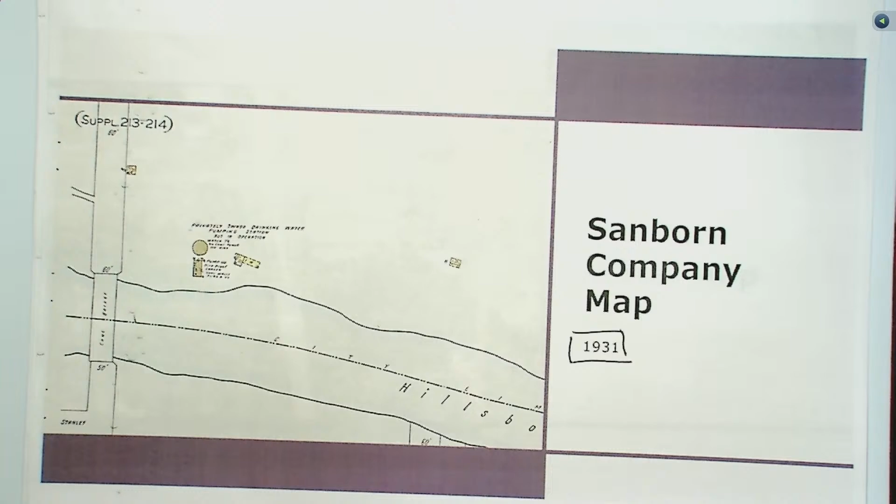Just a little bit of background: looking at the iconic tower, it's very distinguishable. It was built in 1927 by Josiah Richardson, a developer who wanted to create a destination point for Tampa, for people to come here and vacation. The tower is 214 feet tall, and 45 feet deep going into the ground. It's Gothic style, and if you dissect the building you'll see the lanced windows, the crenellation around the parapet, and at the lower level, the buttress.

It was designated as a local landmark in 1989, and this was the inspiration when Mr. Richardson had his vision coming forward.

Sulphur Springs was a park, as I stated, a destination for tourists and locals to visit. It was accessible by streetcar, which came all the way there, far out from people within the city. It included a swimming pool and an alligator farm. The pavilion is still there, just to the east of the tower, along with the gazebo.

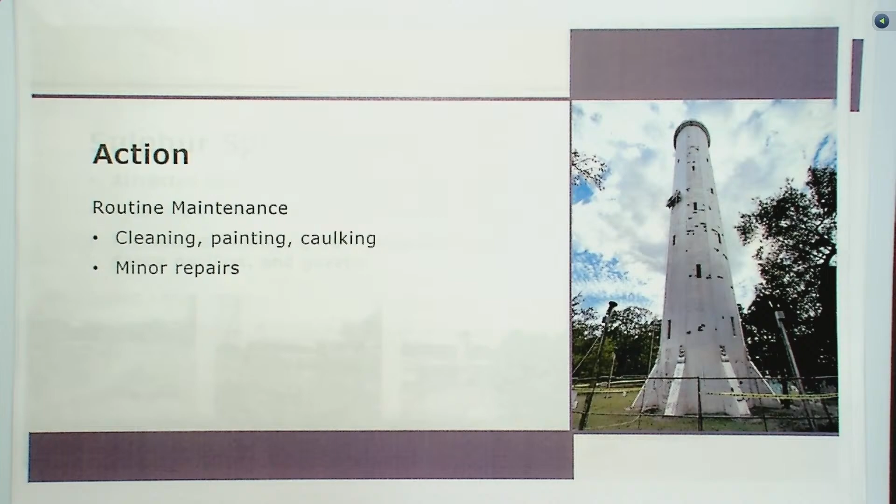We recently did a renovation to the structure. Just sensitivity cleaned it per the Secretary of Interior standards, then painted, caulked it, and did minor repairs. If you get a chance to go by or look at it from a distance, you'll see that it's changed its appearance. Moving forward, we'll use the application standards from the Secretary of Interior for the rehabilitation. It was a successful project.

It's still a park, it's open. You could come off of Bird Street, go there. You could access the river right there as well. And then I talked about the gazebo as this kind of partner companion building that's there that you could walk through a trail and go that way as well. So that's preservation in progress for this month.

Now moving to legal, she'll address the board. Good morning. Dana Crosby Collier from the City Attorney's Office.

Regarding the conflict of interest, does any member have a conflict of interest with any item on the agenda this morning? I do not. Thank you. Has any member had an ex parte communication regarding any item on the agenda this morning? I've had none. Okay, thank you.

Thank you, Dana. Moving down the agenda, there are no continuations reflected on this morning's agenda, and we're ready for the swear-in. Ms. Guzman will swear everybody in that wishes to testify.

Please stand up and raise your right hand. Do you solemnly swear or affirm that the testimony you'll be providing today is the truth, the whole truth, and nothing but the truth? I do. Thank you.

The first agenda item is BLC-24-0000-101, for the address of 1901 East 7th Avenue. There is a contributing structure at that site, dating back to 1905. The underlying zoning is YC1. The existing square footage is about 11,000 square feet, and they're looking to add 8,000 square feet. The request this morning is for a certificate of appropriateness for new construction in addition to a contributing structure, with site improvements.

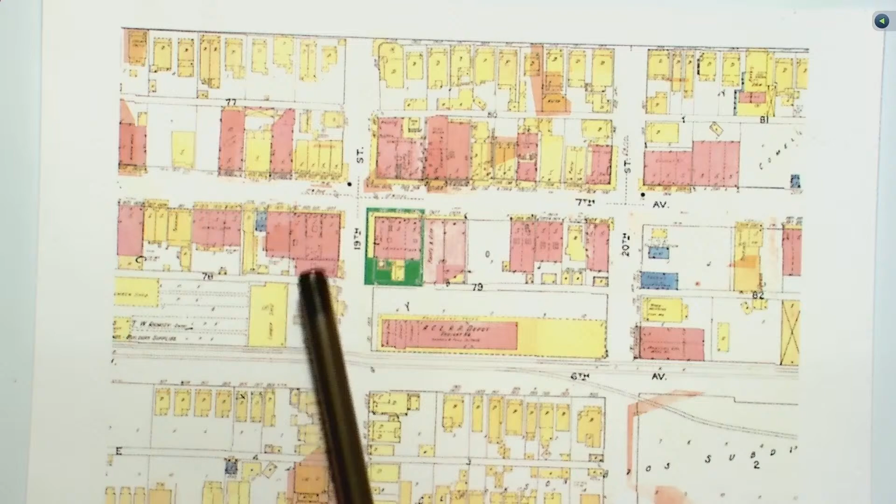This is from 1929. The red indicates brick construction, yellow is frame construction. You see some smaller buildings here that were stores that anchored in that corridor back in 1929.

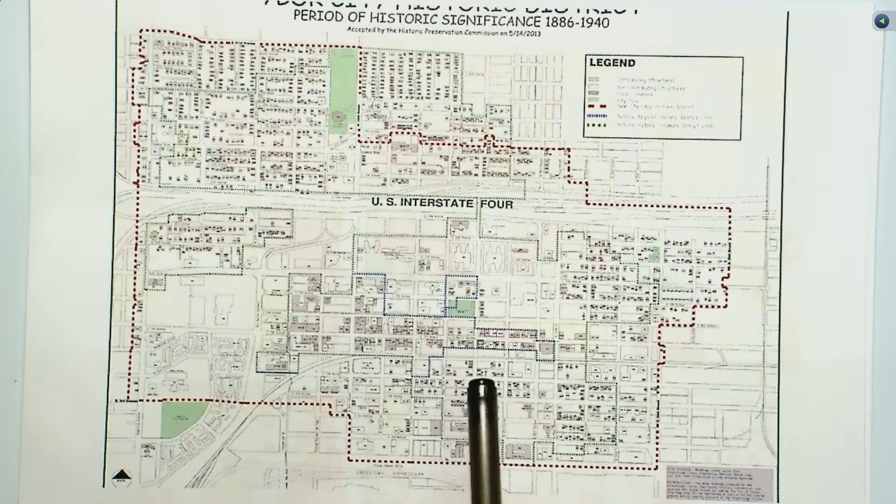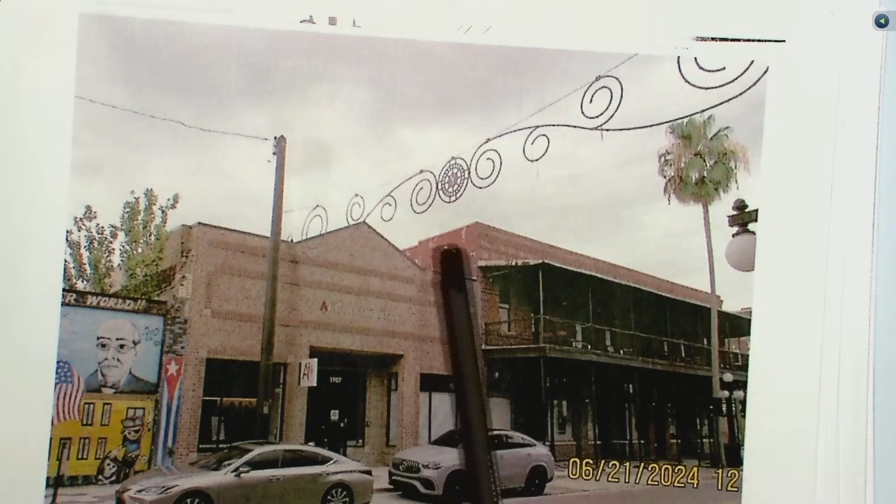This is the abutting building on 7th Avenue. This is the property in question, and just kind of a different perspective of what you see there. And to conclude, a couple of street shots.

Hello, my name is Andrew Matson. I've been sworn in, and I will be the architect of record for the project. I'm a partner of AI Collaborative, which is the building right next door.

We're looking at redesigning, or making a building addition to, 1901 East 7th Avenue. That actually used to be my old office building, so I have a personal connection to it. I worked in there for 12 years.

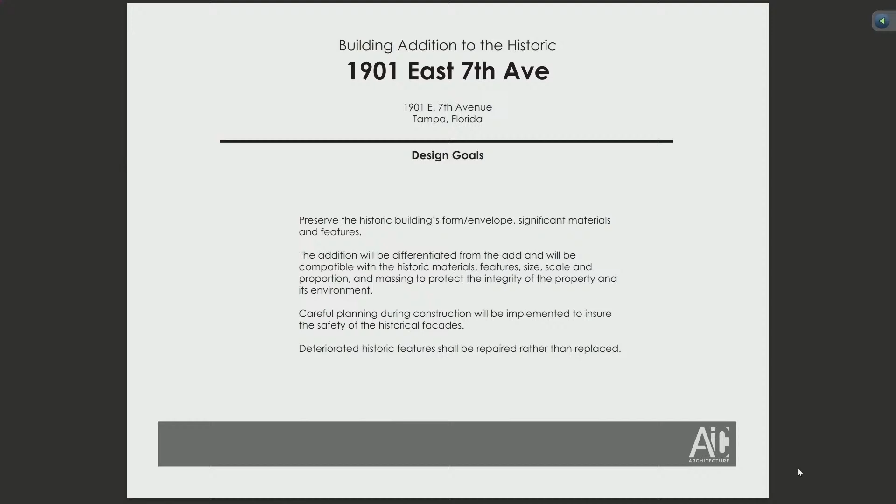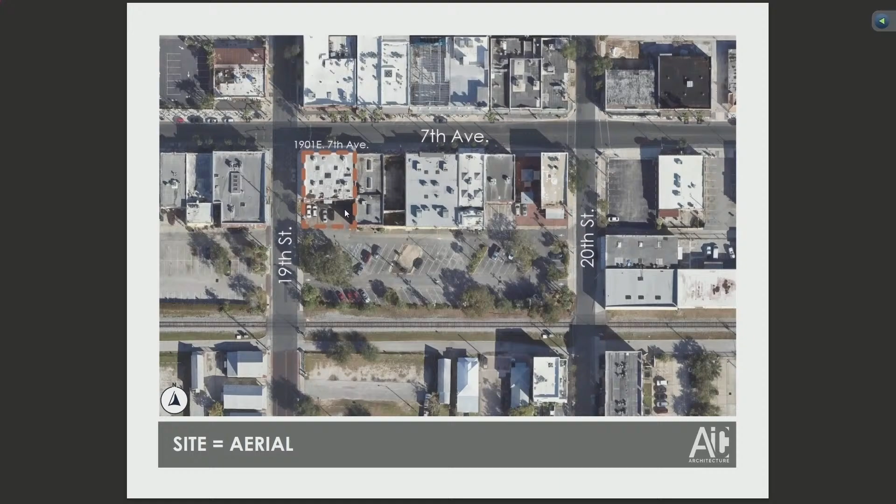As Ron said, it's right on 7th Avenue, right across from Acropolis, right next to our office on 7th Avenue. The addition is going to be, like Ron said, in the back of the building. There's the property on 7th and 19th. You guys have all seen the views that Ron has done. The corner, the addition, which will be in the back.

So the back of the building, I'd like to note that on our renovation, the back of the building is actually not brick right now—it's stucco brick. It was in disrepair a long time ago, and they had put in stucco brick to fix it. So when we're renovating, we're going to keep all the facades minus the back of the building.

So we'll have 19th, 7th Avenue, and even the wall abutting our old property. We're going to remove the back wall, and we're going to remove the actual floor structure of the building to reinforce it, because it's a wood structure that's got damaged, termites. So we're going to renovate the whole interior too.

As Ron said, we're planning to add the hex pavers along 19th Street. Currently they stop right at 19th, but we're going to wrap the corner on our building.

This is just showing the alcoves. We're maintaining all the alcoves of the existing building, the tile pattern, and such. Part of this is also going to have ADA renovations, because it has to currently meet current ADA code. So some of these pieces will have to be brought up, but the main entrance will be ADA accessible. This is not going to be the accessible entrance, showing the existing.

So this is the view showing the original historic brick to the stucco brick that wraps the corner. Some of these are existing materials of the building.

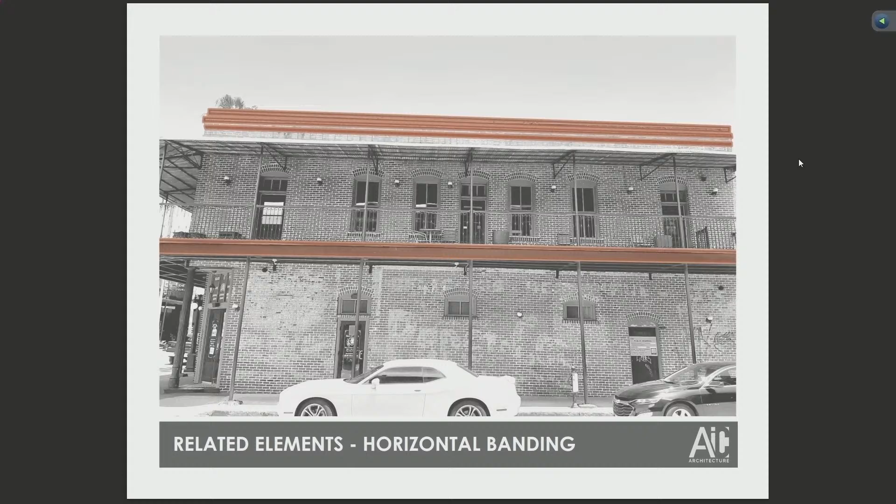Here, this is part of our design—the horizontal banding, as Ron had stated, the balcony, the banding of the building, matching the front facade across the street and its banding. When we do our connection from our new building to our old building on 7th, we're going to do a glass hyphen, very similar to what we had done on the German American Club.

So here's the existing building, showing the existing structure and our proposed addition. Part of what we're doing to differentiate between the new and the historic or contributing structure is we're actually not going to be right on the property line. We're pulling it back off of 19th by about 3 feet.

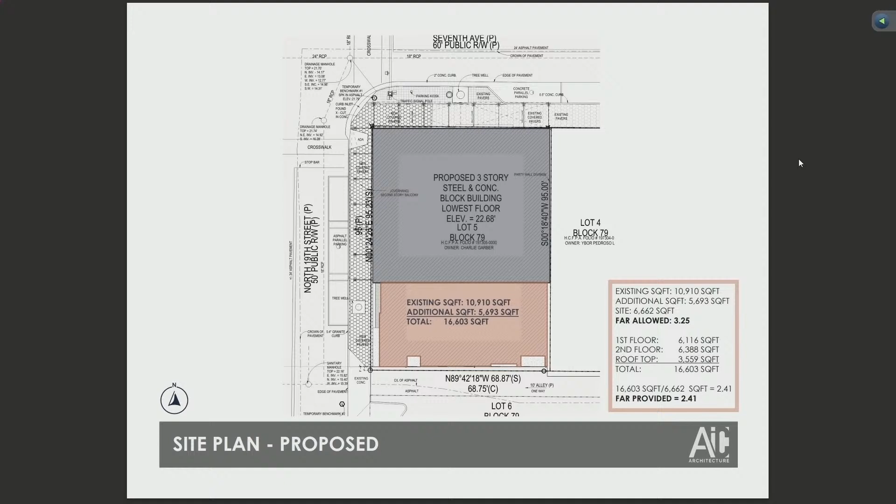Also in the back of the building, we're going to have some service doors, so we'll pull it off the property line back there—about 2 feet off the back property line. In the existing structure, we're going to demo. When it was a retail store, there were 3 different bays, each at different levels and different heights. We're going to clean it up.

Part of the structure, when we demo the building, we have to put new supports, new columns in, so we're going to have to remove the floor slab. I have my structural engineer here, Laura Minton, if you have any questions about the demolition, because we're going to be very sensitive to the demolition of the project, so that we do not have any type of collapsed structure.

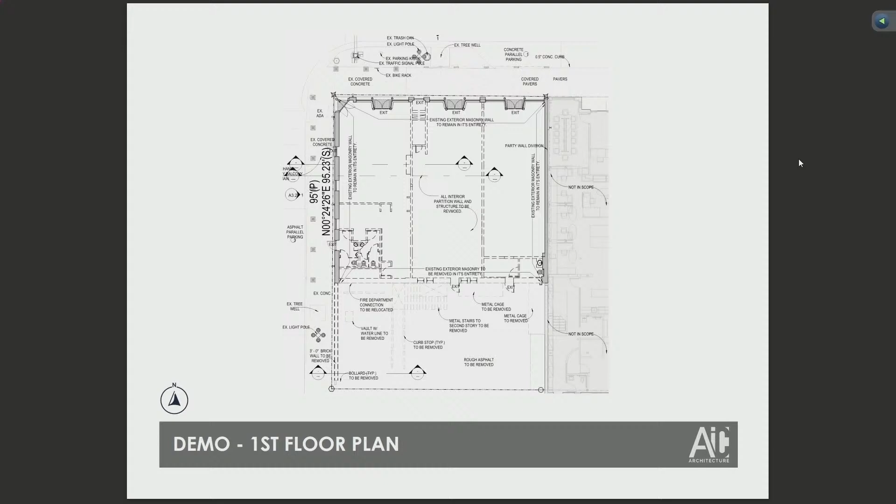We're gonna do micro piles inside the facility. Then as we remove the structure, we'll shore it up. The steel frame will then be put in, and we'll stabilize the building as we do the demolition.

The second floor was office space. We're demoing the roof, because we're gonna put a rooftop terrace on it.

This will be minimized, so we've pushed it back, and we've worked with staff tremendously on minimizing our impact to the existing building.

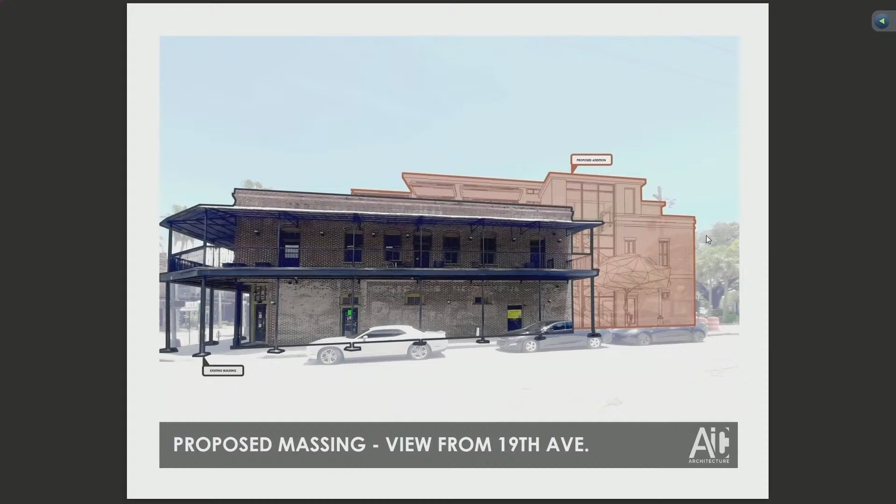The building masses, we have obviously going up 3 floors now, but we're trying to keep the addition from the street level from 19th working very hand in hand with the existing structure, but keep it differentiated from the existing structure. So that's the glass connection to the brick addition in the back.

So in materiality, we're keeping the 2-story addition that's in the back. It will be brick. It's going to be painted brick to differentiate from the historic brick.

The glass connector will be a storefront, or actually a curtain wall, very similar to the German American Club, where you don't see the frame. The frame is behind the glass. It's an SSG system. The top addition is going to be stucco and glass operable walls.

So the glass that you see, we're trying to bring the inside outside. In the times of the year when it's acceptable to have the building open, we're going to open it up and get it as open as possible.

The back of the building, that's where the addition is. It's going to be brick. And again, we differentiated, we keep the brick only going up 2 stories. Then when you get up to the 3rd-story addition, it's going to be stucco to keep that hyphen.

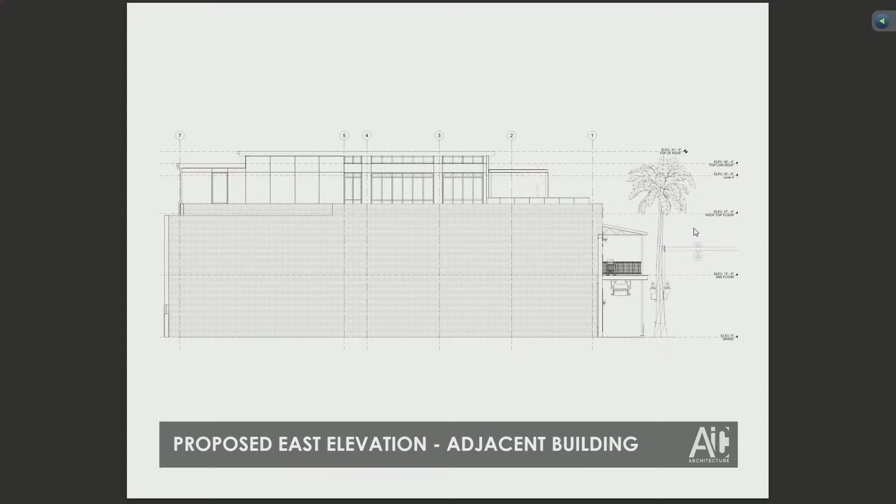Again, this is the eastern view. This is actually an impossible view, because my office sits right here, but this is just the east elevation on it.

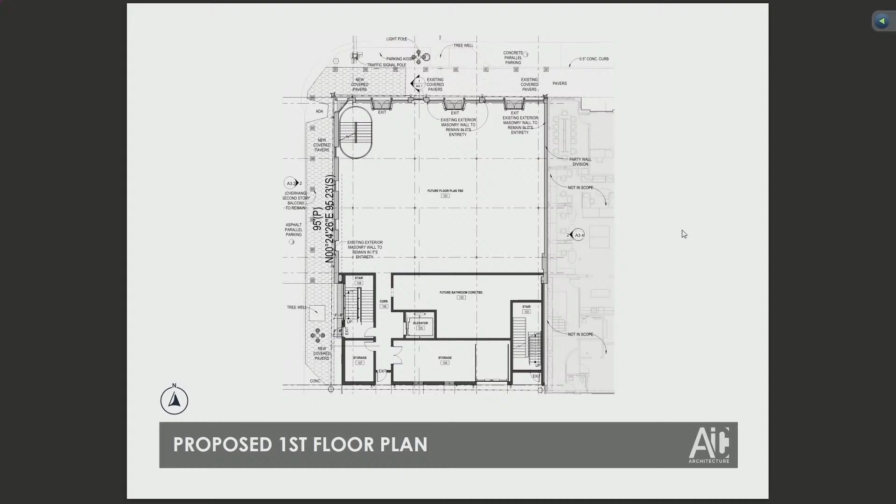The floor plans, you can see the columns, basically what we're trying to do. Part of it is we can't go right up against the walls, so we have to be very careful of the foundations as we drill, to not disturb the foundations. So we're pulling all our columns off the wall to help with the structure of it. Exiting.

We don't really want to see the addition, so we've pulled it back sufficiently so that you don't really see the enclosed portion of it.

And again, this portion of the interior is actually going to be interior-exterior. We're going to have the folding partitions of glass so they could open up the system and make it flow from the inside to the outside.

And again, this is the sunshades, the louvers, the operable shades for the exterior.

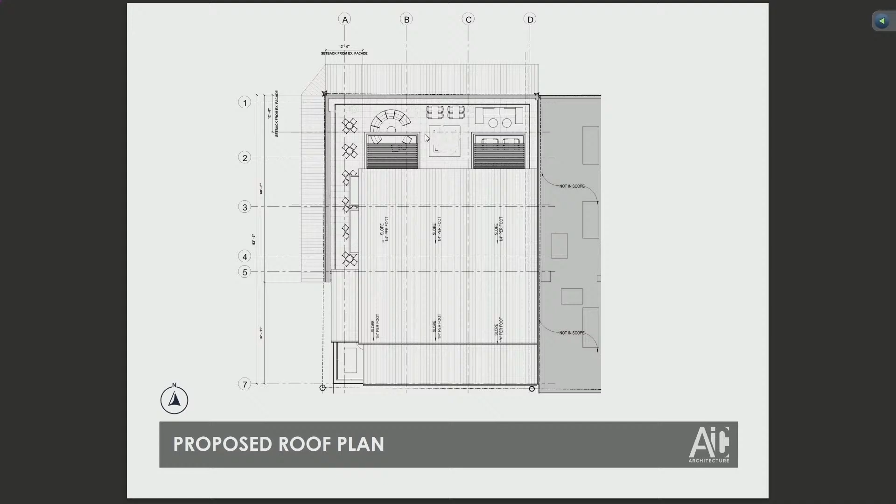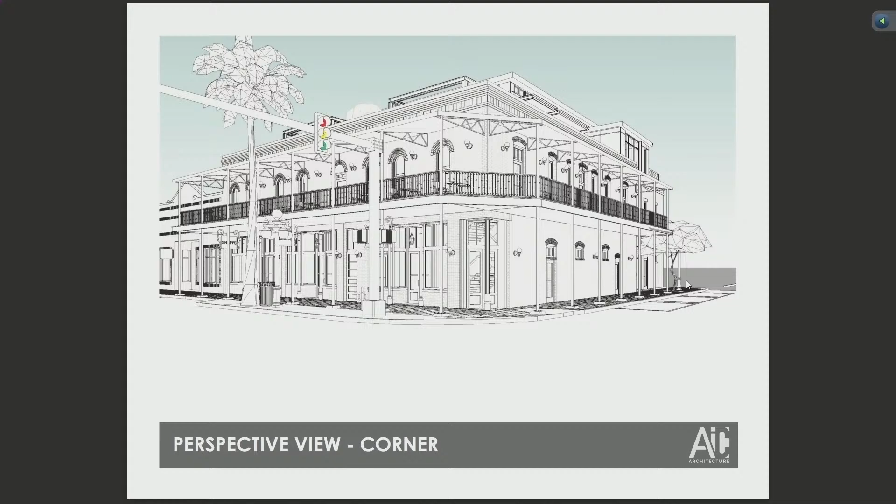Going back to the 3D views, we're being very cognizant to try to minimize the visual impact from 7th Avenue and 19th Avenue. You can see we're wrapping the brick. The pavers currently stop right about here—these are the hex pavers, and we're wrapping them all the way around to the drive lane of the existing building. These are just the black and whites on this.

Our wall sections—part of what we were doing, again part of minimizing the impact, is stepping back the existing facade. So we did a section, line of sight, basically as we're stepping back we're trying to keep the building and the view as minimal as possible from it. We took a proportion from the balcony and went back 12 feet, then another 12 feet, so that every time you step up, we're really trying not to have that visual impact from the street level.

One of the things I'm sure you saw in the initial design of our exhibits was deemed not compatible. Part of it is the elevators—the massing was actually a lot bigger. So we worked with staff and with the client to really try to make the massing better. One of the original designs had the elevator in the back corner. We've since moved the elevator inboard to the project, which helps reduce that corner and allows us to lower or step the massing back of the building.

So this is the original—on the July 3rd submittal, that orange part is the mass that was bigger, a 3-story volume. As we move the elevator back in, it allows us to really reduce the mass of the elevator. Also, the top structure was a lot taller; we've since dropped it 3 feet. So our building now, the top of the structure is about 41 feet, which is still 4 feet below the maximum height. We've also worked on lowering some of the shade structures and pulling them back.

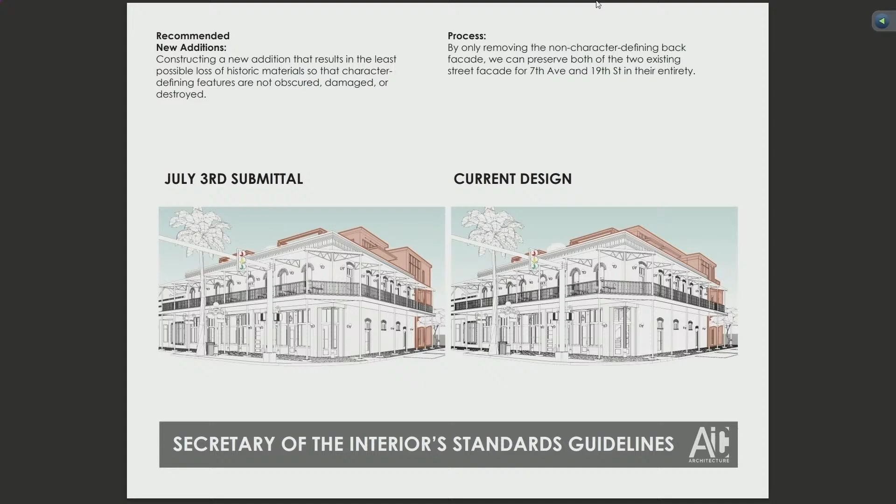So this is, again, the massing structure. Part of it too is going back to the historic preservation standards, working with the massing and trying to differentiate the new structure from the old structure, but be very compatible with it. We're still keeping the horizontal banding, but as we've lowered it and pushed it back, I think it's actually a lot more proportionate now. We're actually very happy working with staff on it, because I think staff has made it a better project for us.

Same thing, this is just the current designs—the windows, our placements of our windows, keeping the existing structure. Actually, as we're rebuilding, we're keeping our floor-to-floor heights the same, so it's just 13'8" roughly between the first floor and second floor, and then another 13'8", and another 13'8".

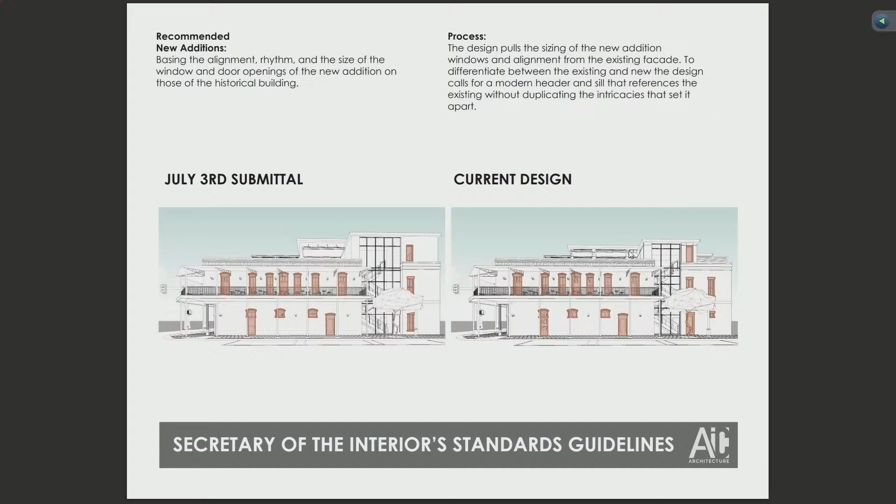Because of the elevator, that's another thing—we had talked about working with staff on lowering it, trying to lower it as much as possible, but we could only do so much because of the overhead clearance required for the elevator to get you up to the top.

This is the glass hyphen, the reduction. You can see how much we've reduced it, and actually made it more proportionate to the building addition.

Again, these are the mass lines, so these are the step backs—there is no structure in the orange area to help reduce it. We've even worked with them on the handrails, because obviously the parapet of the building is not high enough for the ADA or for the handrails or guardrails for fall protection. We've pulled the guardrails in—they're going to be glass, but we've pulled them in about 3 feet off the property or off the edge of the parapet, so you won't even see the guardrails.

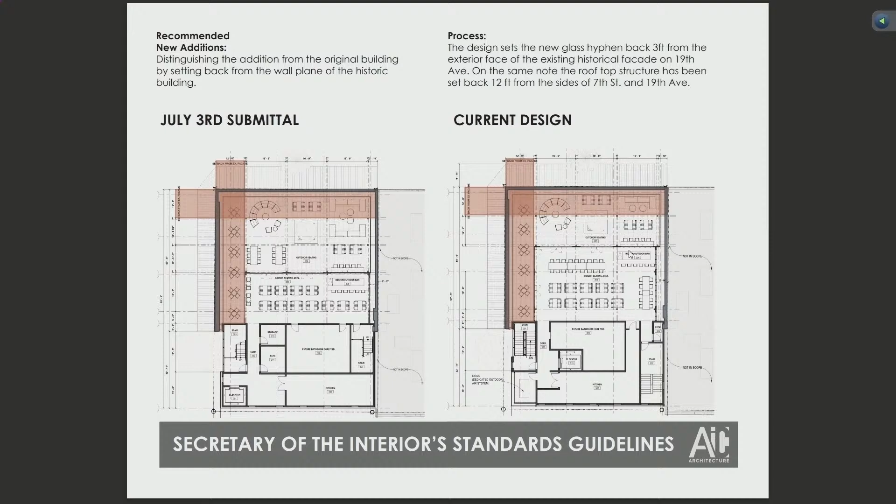Our colors, we're keeping the brick and the stucco is going to be painted a dark gray taupe color. As we played with different versions, lighter neutral colors actually started standing out more, and the dark colors really help reduce the massing of it. So the gray color is the brick we're painting. We're going to use the same style brick, but we're just going to paint it to differentiate the brick.

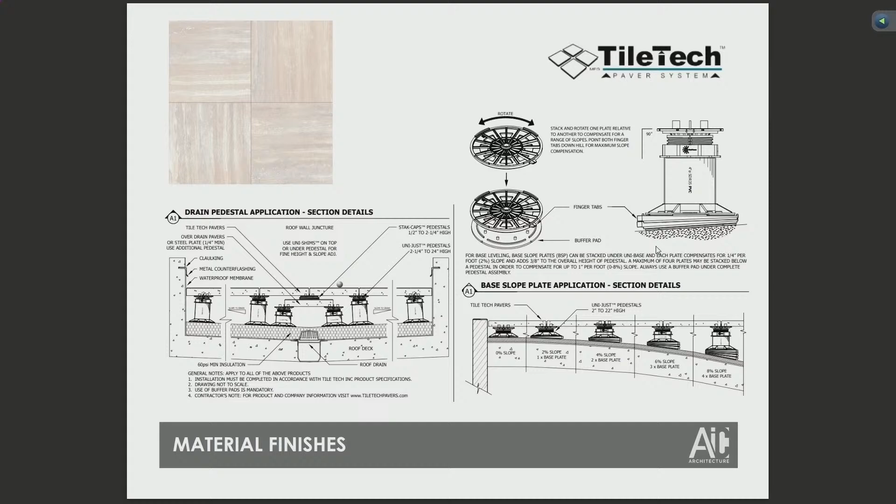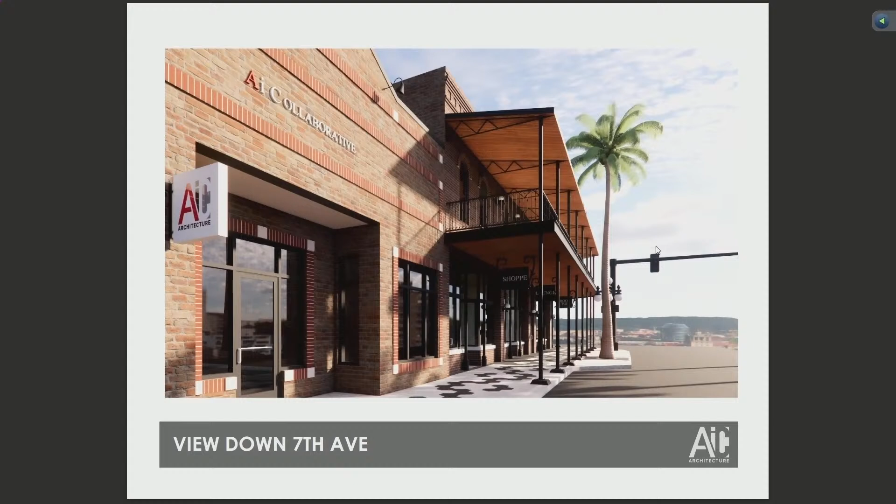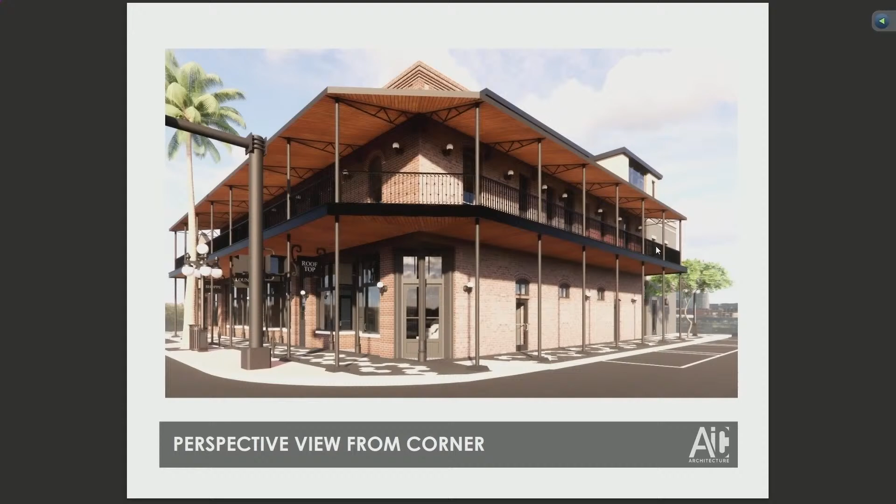Again, here's a view standing at the corner. This is looking towards 7th Avenue on 19th. The brick pavers—

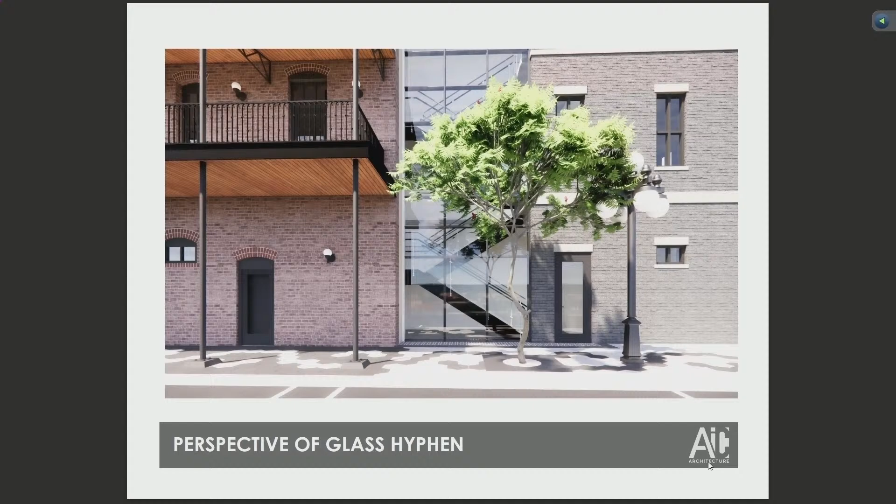Looking at the glass hyphen, and the entry door, because what we're going to have is actually that door. So the rooftop will be a restaurant, and they're going to have different operating hours than the main building, so they really wanted to have a new entry piece. So this is the entry that you'll go in—you'll go up the elevator, up the stairs, and get to the rooftop terrace.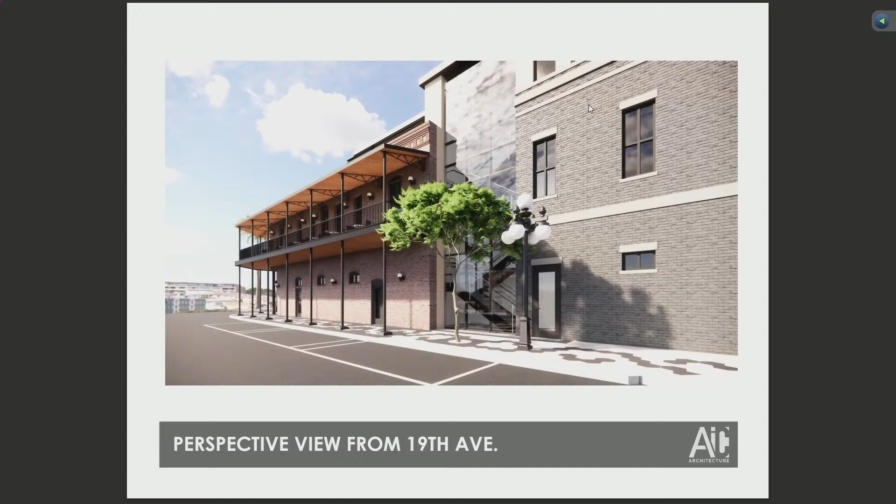And if we do make any changes, that will be part of it with the windows to the balcony. Our intent is just to keep the balcony as is. We're gonna keep the metal look still on the balcony, but it might have a painted finish.

And you mentioned the rooftop area, the front setbacks on the upper levels were 12 feet, then you stagger that. Is that the same dimension? It's tough to read the dimensions. Is that another 12 feet on the western side? Yeah, so it's 12 feet on both, on 19th and on Seventh, we're 12 feet off of it to keep that proportion.

Let's go to our west elevation, that would be the 19th Avenue elevation. Probably your flat elevation, not the rendered one. The rendered one, nope, sorry, last step. There it is, okay good.

So let's talk about the new windows on the addition. The existing building has eyebrows, you're not gonna carry through that eyebrow. So on the first level, are those the same size as the existing high windows? Yeah, so we're gonna try to keep the same finished floor, but instead of the rounded arched windows, we're just gonna do square windows. But it's the same size? Yeah, same size, and it has a divided light there.

So on the second floor, they look a little bit bigger, but I'm not sure if it's the same size. In the rendering, because these are the historic windows, they're a lot smaller. We're keeping the heights and proportions the same, but there's gonna be a storefront system, so they're impact-rated with 2.5-inch frames on it.

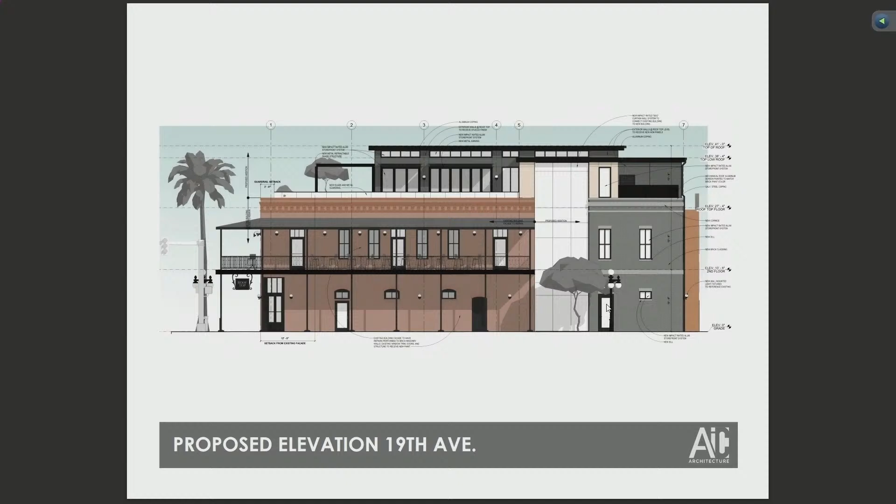So it'll swing out, but still within the property line. We didn't want the pockets that are for rain on the backside - those are close enough to the property line where we can't swing out. We do want them inset for egress, ADA, and rain shelter, but you have to inset them.

And those 3 middle ones are all going to be louvers, that's Storefront. The fresh air, louvers? Louvers, okay.

And you're kind of on the fence with the downspouts, or? Yeah, well, I would prefer to do interior ones, and I think we could get that done.

When we're looking at this, from the existing photos, there's a ton of electrical panels and mechanical units out there. So that's where we want all that inboard in our building, that's part of the garage, the service entries on the first part. So we've created that addition will be the service portion. The fire riser, we're gonna have to move - the fire riser currently is where the stairs are in the building.

We're gonna have to rework all that with the civil. And do you have any wall sections for that back area? I didn't see any.

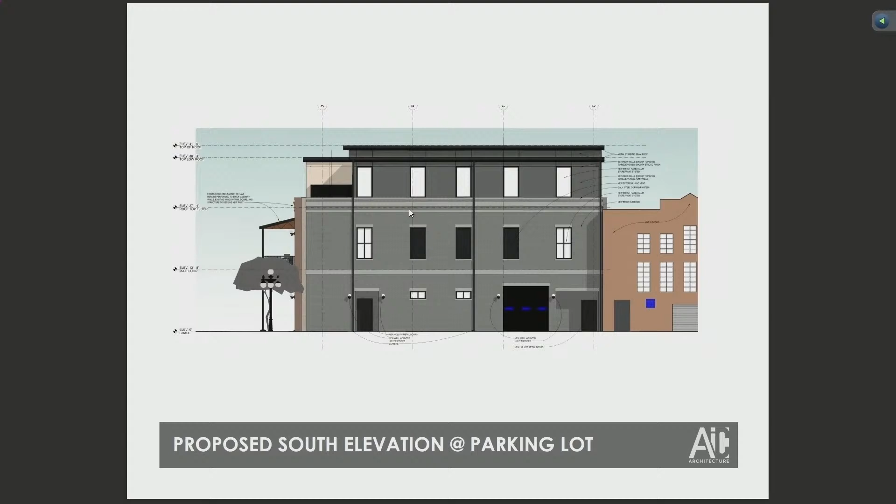I think it's gonna be CMU, main brick building section, the brick portion. So we're gonna do CMU and then full brick on it.

And those overhangs, is that - you're gonna use like a soffit panel on that? On these pieces, yes, because you're gonna do kind of a flat roof, flat structure.

Yeah, so part of that was another thing - we had a very modern structure, it was sloped, kind of like canted. But as we worked with staff and the massing concerns, we've straightened everything out and dropped it to help keep that setback so you don't see it, because you were seeing the peak of the roof. If we could flatten it out, it doesn't really hurt the overall design, and it keeps that horizontal banding - since there was no angled roof in the beginning, we've since flattened everything out.

Okay, can we look at the front elevation? Which one? Front elevation, the colored one? Sure.

So this is 41. That's a little setback even on your side, like where your office is, that's kind of set back, yes. Actually part of that too is 5 foot - it was a little bit closer, and I said no, if we put any type of operable walls, we got to make sure that we're 5 feet off for the fire ratings on it.

Again, to help minimize the addition impact - not that I think you'll see it, but I think it makes it easier to construct, and it'll also help for the fire ratings. We don't have to go crazy - we're allowed 25% openness on that facade. And I think being 5 feet off, if you're less than 5, it drops down to a number that we can't work with.

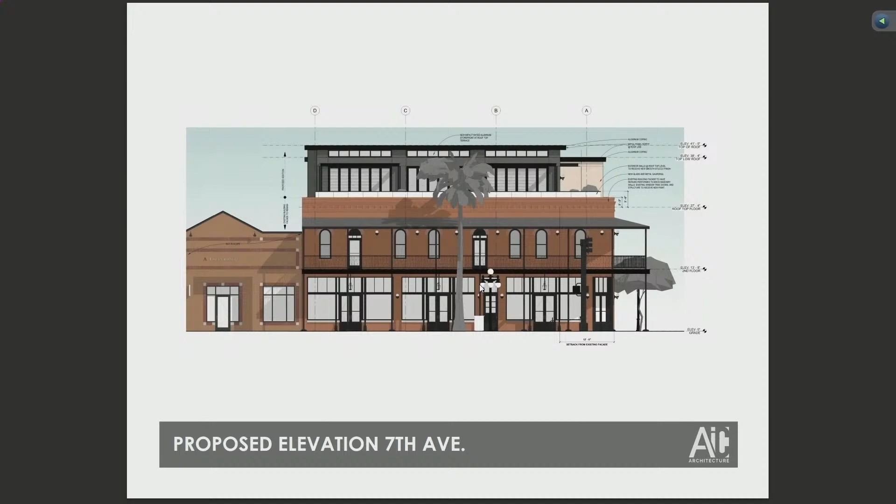Any other questions, follow-up questions? I have one more. You had mentioned you have your structural engineer here. Have you already done a structural report? It sounds like you have.

So we haven't done a report yet, because our project was, we were gonna demo the portion of it. I do know that there are parts of it, because it's an old building, and it's a wood structure, and when I used to work in there, you could definitely hear the people creaking along the floor, and then they did some renovation work in it and removed walls. I know the first floor had load-bearing partitions, the second floor had load-bearing, they've opened it up, put some beams, but it was all designed for, I don't even think, the current office loads on it.

So we haven't done a report, but they're gonna do one, or we're gonna have to do a shoring report on it, so on how to keep the facade.

One more question. I don't remember seeing anything about hardware, so the new hardware. Yeah, so the existing doors, again, because we're maintaining all of the existing building, the front facade. So the back will just be, the doors that we add, are just gonna be lever, ADA lever, Schlage hardware, nothing. And the door to the storefront will be the standard storefront curtain wall door, push pull.

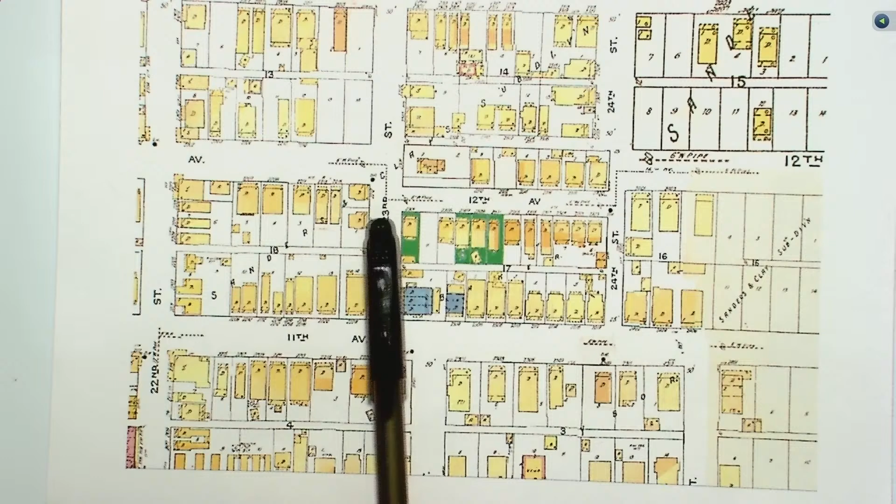This is the Sanborn map that dates back to 1929. The properties in question include two duplexes that will be built, a historic structure that is still current and will show up in the photo presentation, and one at the corner. The subject site is on the corner of 23rd Street and 12th Avenue. There is a functional alley in the back, partially unimproved but open, and as part of this project they're going to reinvigorate the alley, which is a positive. So the grid will be put back in place.

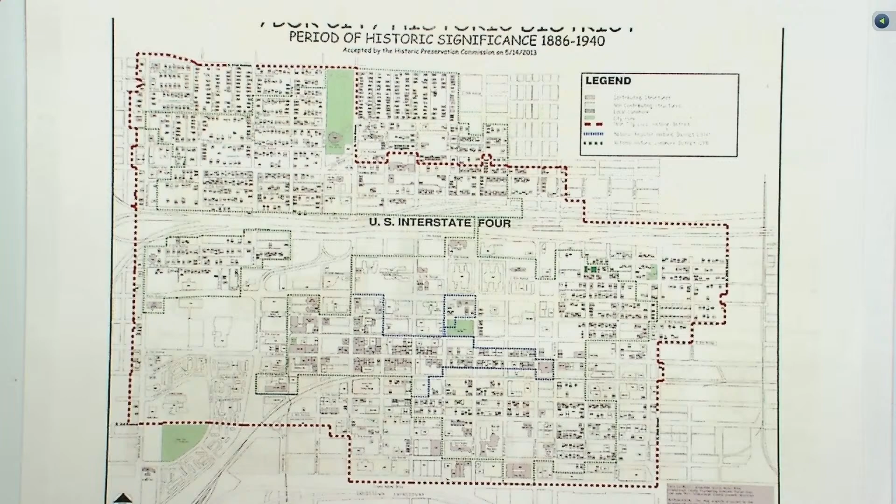This is our vicinity map. The red indicates the local historic district. This is just to give you a sense of place. Properties in question are over here. I'm going to work from west to east. This is 23rd and 12th Avenue. This is the corner parcel.

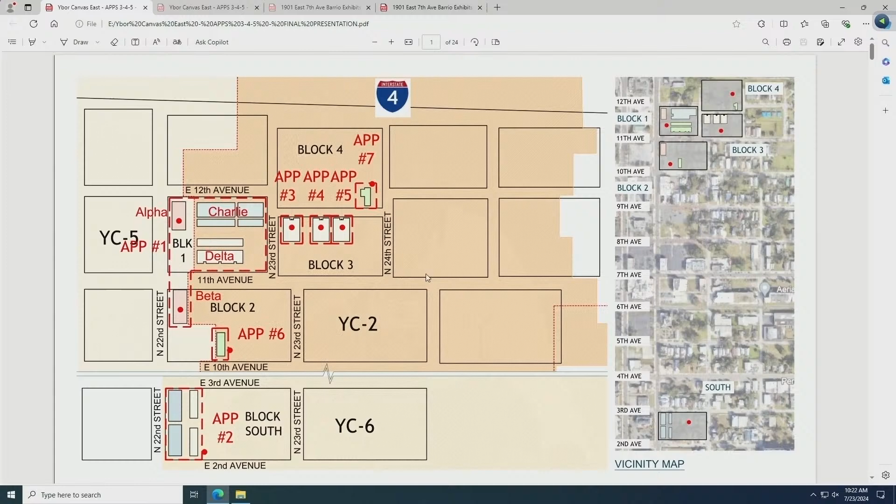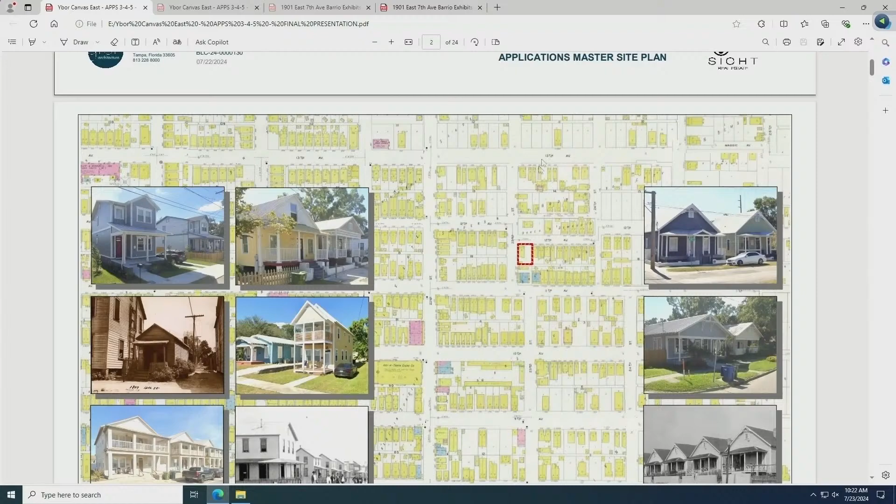Again, we'll go back to the Sanborn map. Can we zoom in? This block, as Michael and Ron said, these are 3 duplexes that are very similar. They have minor exterior differences, which were influenced by comments we received from staff, but they're all here in a row. So I'm going to give an overall presentation for the first one, and then abbreviated presentations for the other 2 that will just show the differences.

What I wanted to point out here is this block is unusual. It is shortened for some reason, unlike the blocks around it. But it is jam-packed like sardines historically, there are 34 residences shown on this map, 24 of them duplexes and 10 single-family. Now only 9 residences exist on that property. So this will do a great job of adding some infill.

We've got some historic references of different single-family and duplex housing in Ybor, used for reference as far as proximity to the street. These 2 houses are at the western end of the block, right up on the street, with 2-story new construction, just to show that housing was built in the historic period very similar to one another. There was a lot of that going on, details right next to each other, close proximity, all had front porches, a mix of scales. Just the things you all know about those.

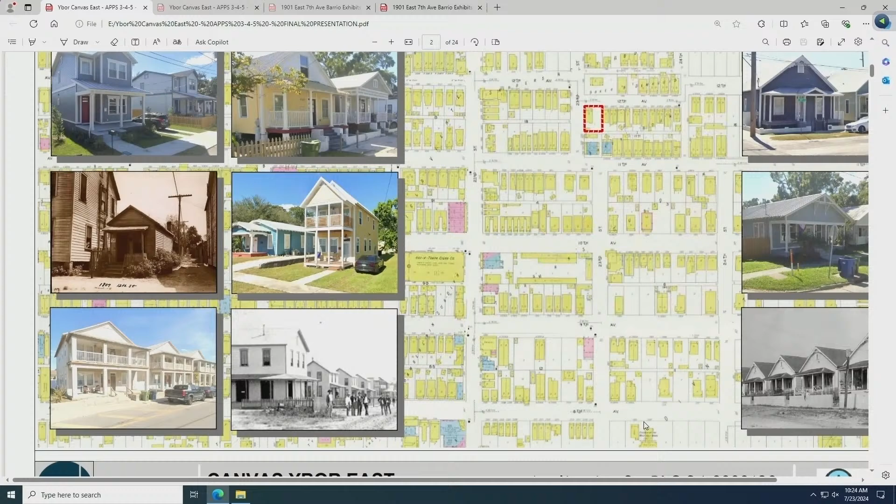I have to zoom out, I guess. Well, there we go. Okay.

We measured and took notice of all of the setbacks for all of the adjacent buildings and came up with an averaged setback. I'm going to go to the next.

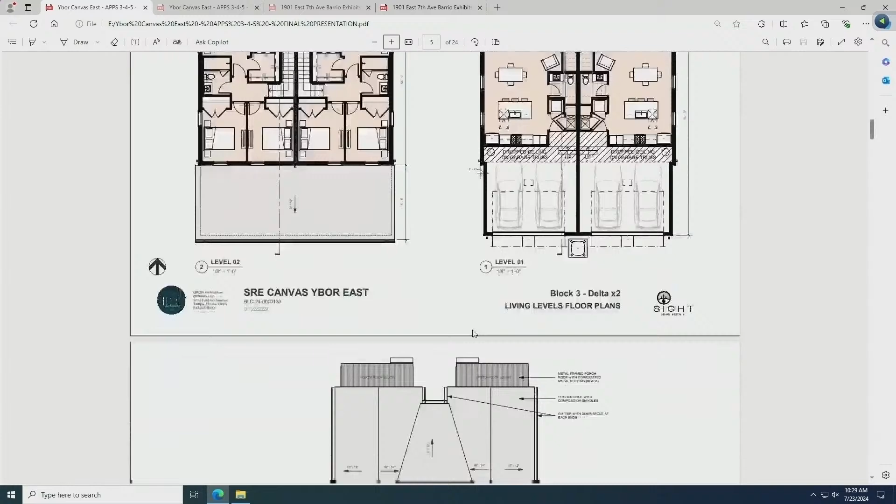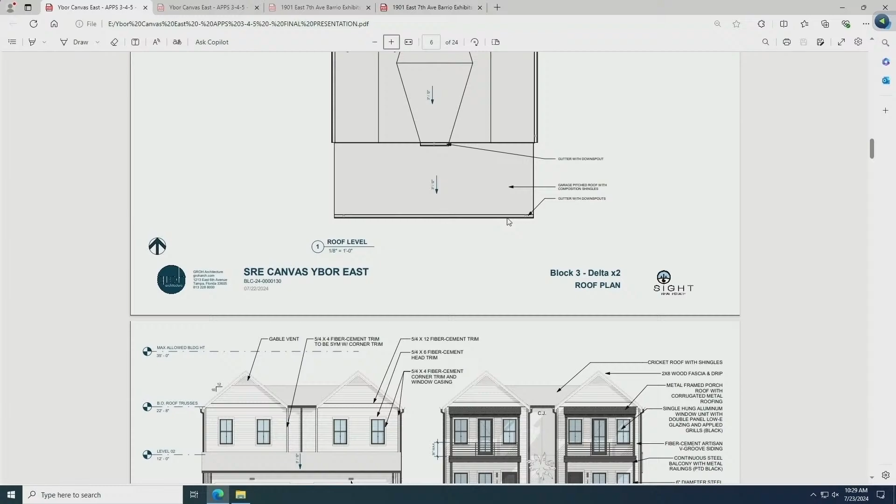Quick roof plan: we've got two gable roofs facing the street with a cricket in between at a lower pitch, a shed roof over the garages, and corrugated shed roofs over the porches. Also guttering and downspouts shown on that roof plan.

This is the front facade of the building, and down below is the facade of the street. So this is our corner block, and then the two other units that will be here, the four other units in duplexes. This is very similar to a product that you saw before in May.

What we're showing on this are gable end roofs coming out to the street with the balconies, two-story balconies, front door entries, 2/2 single hung windows. In this particular unit, we are showing triangular attic vents as well as horizontal siding.

We are using composition shingles on the primary roofs with corrugated roofs on the porches. We've aligned our porch with the adjacent home here.

With this home, the street drops down to the east, and the homes further south have many more, they have 4 or 5 steps up to their porches. But these two have 3, and that's what we're going with as well. That keeps us from having to have a railing and fits in with the fabric.

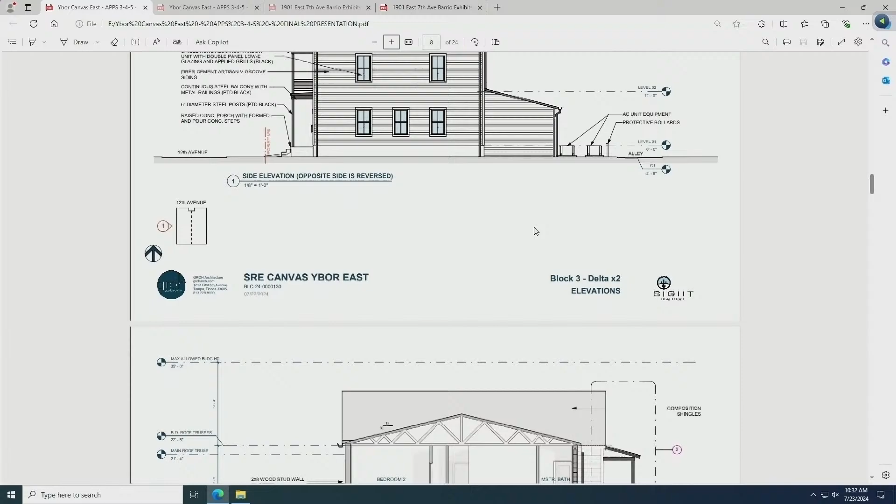The side view of the porch and the roof, AC units in the rear. Section through the building: the alley is on the left and the street is on the right side of this. This is cut through the indention that's in the building, so you're seeing the side view and porch of one of the units, the masonry wall as exterior, and then the sloped roof over the garage.

This is that wall that hangs out over the garage, and that will be built out as a wood frame. And you can see the stepping from the street up and then back down to the garage and the alley.

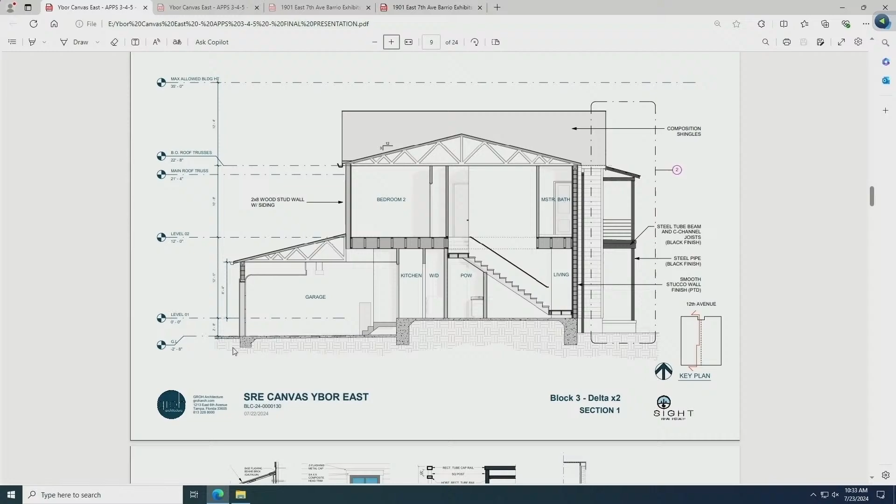This is our primary wall section through the front entry. Again, it's all made out of steel, and our goal is to paint this black with a main white finish on the building with a horizontal rail. This would be one of the differences between this unit and the others.

Masonry construction allows us to get a 3-inch recess for our windows and doors, which is really nice. We're showing trim around the windows. The windows will have a precast sill, but they'll be trimmed out in wood in a very traditional manner.

And then the section of the porch, this shed roof porch, showing exposed rafters and steel construction members with the corrugated roof. And our finishes.

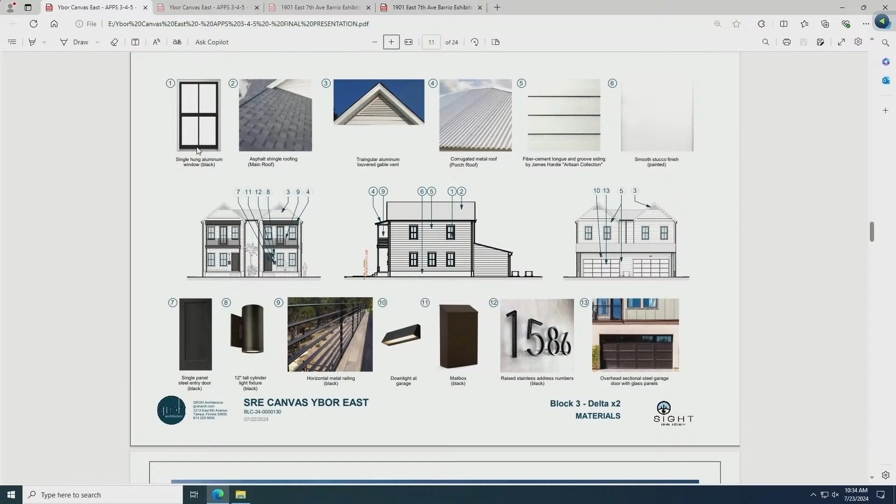As I said, the 2/2 single hung windows, we have a sample of that. These are aluminum windows, but to use an architectural word, chunky. They have some weight to them, and the muntins are all exterior applied.

Thank you, Michael. We want to show the operation of that. We're using a composition shingle on the majority of the roof, and here is the detail of our gable vent at the top of the gable roof, corrugated steel roof on the porch.

This is that James Hardie artisan collection, which is that flat look, a smooth white stucco in the very few places that we have it, which is just between the gable ends and along the base of the building.

We have here all of our fixtures with a single panel flush door, no light in the front door. The light over at the entry here, it's by the entry door.

The railing that we're showing for this particular unit, mailboxes, which we've used in the past, the street address, and then we have the light, down light over the garage doors, along with the image of the garage doors with the light above.

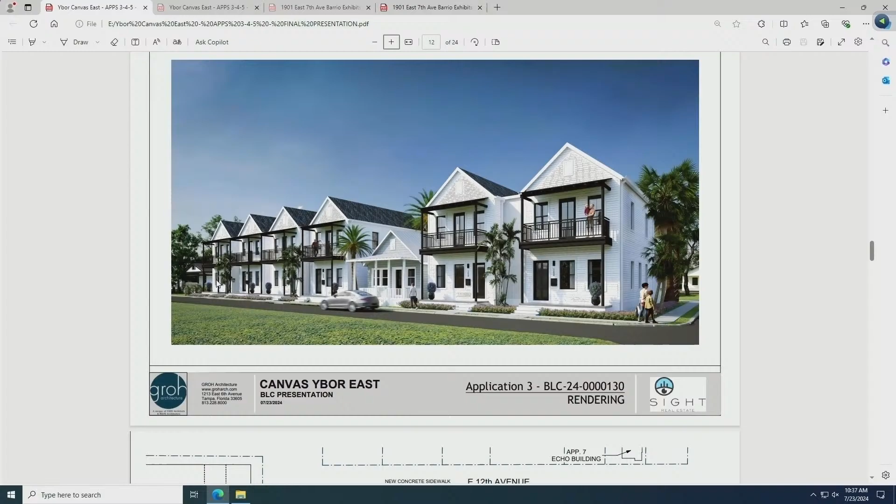I think, Michael, I think that completes that part of the presentation for the first address.

Good morning, Commissioners. Ron Velam, staff for Historic Preservation. As I alluded to, and Stephanie supported that, this was a complete presentation. We're going to focus on this one, and then the next two that come forward will be a little watered down, just showing the changes. I believe we're going to move forward.

So with this one, the corner unit, staff find this application consistent with the Ybor City Design Guidelines, and we reviewed these plans on July 3rd, 2024. Under conditions, I just want to briefly go through each bullet item and show how we worked together to find the product that was presented today.

The first one is the variations on the gable ends. They brought a project in a couple months ago, and this is very similar to that, so some changes in some of the details are needed. When you look at the historic fabric, you see a lot of twin houses and sister houses throughout the district, but then at times you see the subtle changes, and that's what led us to that condition on the staff report.

The mechanical systems that they have in the rear, and the vehicles, they're going to interact together. There's got to be some kind of bollard or something there to protect the mechanicals as illustrated on the site plan. No fencing will be shown or submitted at this time.

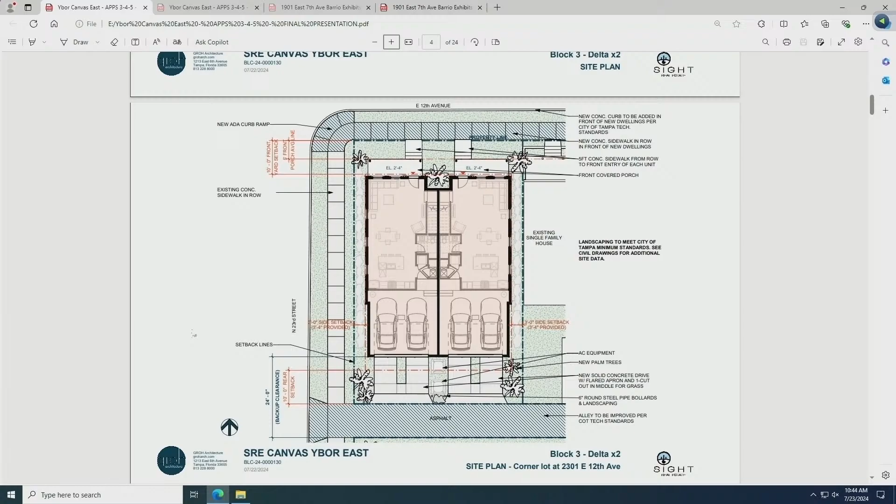Thank you. All right, I think maybe the rendering's best to show us - some questions about if there's variability that we can introduce a little bit to each of the units, whether it's the gable vents or alternative railings, to give a little more character, so it's not all just... I understand that from the workforce housing back in the day, it was very much an efficient type of construction, replicated for efficiency and all that kind of stuff.

But over time, you get a little bit of variability just to make them a little more unique and that kind of stuff. Is that something we could potentially do and take a look at? I see from your street elevation, the ones on the far right have different gable vents. Maybe we can start populating them and introducing a little bit of variability through small things like the railings and the gable vents into the project as well.

Yep, we did do it, we think it's a great idea. I'm a little concerned, the team is a little concerned about change for the sake of change. It could easily get hokey, which is what we're concerned about.

But we do appreciate the input, and we are looking forward to having a little something different here on the corner. The corner, we did the horizontal rails, as you said, and the different shaped vents. These two are so close together that we chose to present them today with the standard picket rails and a small rectangular vent. We're open to reasonable suggestions about if you feel it's appropriate to change one of these buildings to something else, but we're a little wary of doing that.

We did add banding at the direction, or suggestion, of staff. We added banding at the end of the gable roofs where this had not been part of the design before. And then the windows in the rear garage as well. Oh, well yes, we added the windows in the garage doors, and changed and broke down the rear facade as I described. Great, thank you. Those are my questions.

Can we go to the site plan?

Just making sure I understand this correctly. So from the property line, you have 5 feet into your porch, right?

And all your porches are 5 feet deep. Is that another 5 feet from the front of the porch to the sidewalk, or is that a little bit more? It's 5 feet from the porch to the property line, and then a 5-foot porch.

This other red dash line is the typical 10-foot front yard setback. Block averaging from everything else on the block street, averaging to that 5 feet. Okay, that's fine, I just couldn't read it. Just want to confirm that.

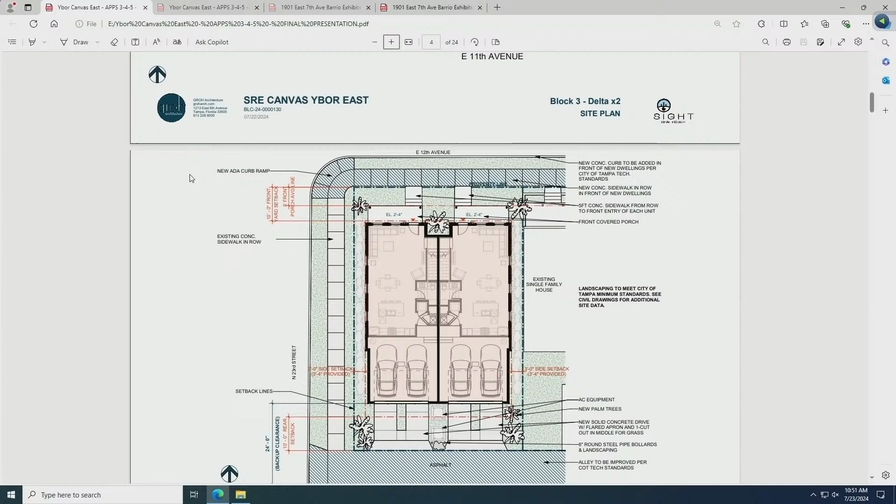Does that match other homes down the road too? It matches the adjacent home and the one right at the end, and this one. As I said, there's a big change in elevation. These two are much higher off the ground because of the sloping of the street. Everything toward 24th slopes down.

But I think you're pulling your cues from that single-family home between the duplexes and that other one. So that's where you're getting your block averaging for both the finished floor elevation and your setback? We're getting the block averaging from the whole street, but the finished floor elevation from these 2 units.

All your windows look like they're single hung 2/2s? That's right, no deviations from that.

Let's look at your front elevation. What's the material of the main entry door? It looks kind of solid and hatched, is there no glass there? There is no glass, just for privacy. I think we might have used glass on the other ones, though, I don't recall.

One way or the other, Michael's fine with putting glass in it if it's preferred. There are 2 different doors there. Once you get up to the second floor, you have mullions that replicate the windows, which I don't know if the proportion might be off a little bit, so I wanted you to clarify.

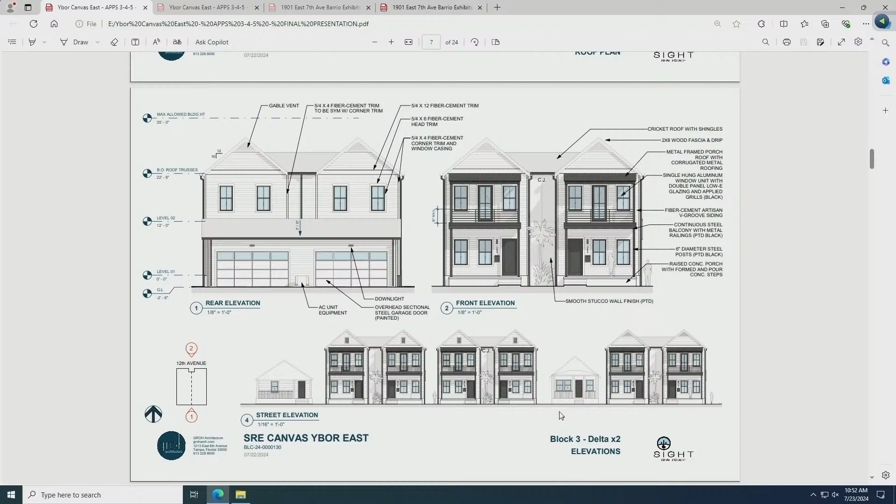If you look at your consolidated elevation at the bottom, it looks like you're picking up the front door from the single-family home there on both of them, but I'm not sure if that's just a hatch or a specific door type. Let me see. I'm not sure exactly what we have. You have photographs of those adjacent houses? Okay, we'll come back to that.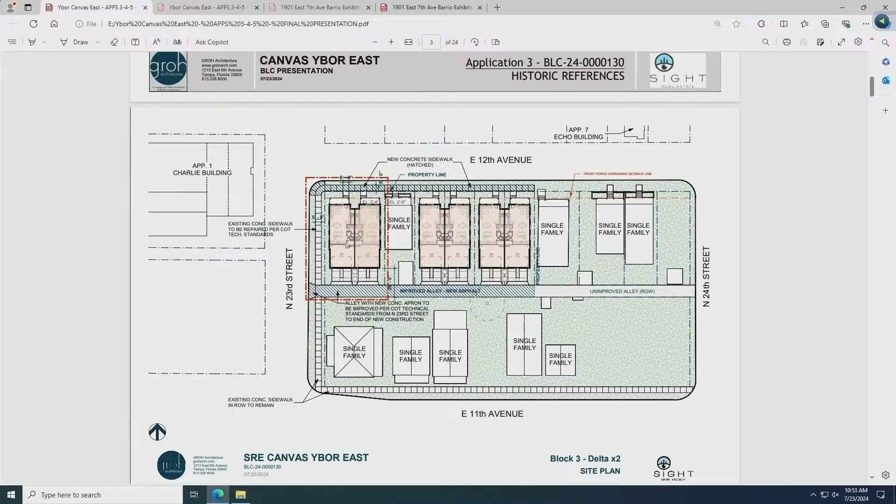Maybe the doors on the first floor and second floor should probably be alike, I'd say. Sure, we're totally open to working with staff on finalizing that. I think you're right, now that I look at it, because everything else reads really nice with the positive and negative, and then you've got that dark door, and I'm just not sure if it's a hatching thing - typically you can do a single panel or full light, either one is fine there.

Downspouts are on the sides of the building, and one in the back, from this elevation. Are those being captured? You probably have some stormwater issues that are gonna go under your driveway. Yes, we haven't gone through the grading and site engineering on this yet. But you'll have downspouts - we'll have to meet city requirements, of course.

And what's your driveway type? Is that concrete, ribbons, pavers? Concrete.

Asphalt alley, solid concrete driveway, flared. I got excited when I saw this—I thought your AC units were between the garages, kind of hidden, but they're between the driveways, not the garages. Yeah, they gotta go somewhere.

What's your square footage per unit? They're under 1,600 square feet in total, 15 and some change. It's a nice efficient layout. Three bedrooms—it's a good opportunity to provide 3 bedrooms, which isn't common anymore.

Let's talk about our garage doors. What do you have called out—is it just the upper level? Let me go to the elevation. So they're solid, oh I see, there's a window—so the top row is glass? Full glass, not like an inset panel? Is the whole panel gonna be glass?

I don't think we've worked through that detail. That was a recommendation from staff—they wanted to make the alleys pedestrian friendly as we improve them. So staff recommended putting glass in there, which was a late change. We haven't selected a specific door, but I've committed to putting glass in that top row. I think that's something we can work with staff on to get something acceptable—not too crazy with decorative ones.

That looks very modern the way it is there, it doesn't match. Are the renderings accurate in the colors? It's like a light on light type of finish. Okay, that's nice, nice and clean.

Any other questions? I just want to review a couple of things that were said. When it comes to the gable ends, is there going to be variety, or are you going with the triangle shown in your sample sheet? On the BLC 130, we're showing the triangular vents and a horizontal railing. But on the other two we'll show you, we're showing a vertical picket rail and a rectangular vent.

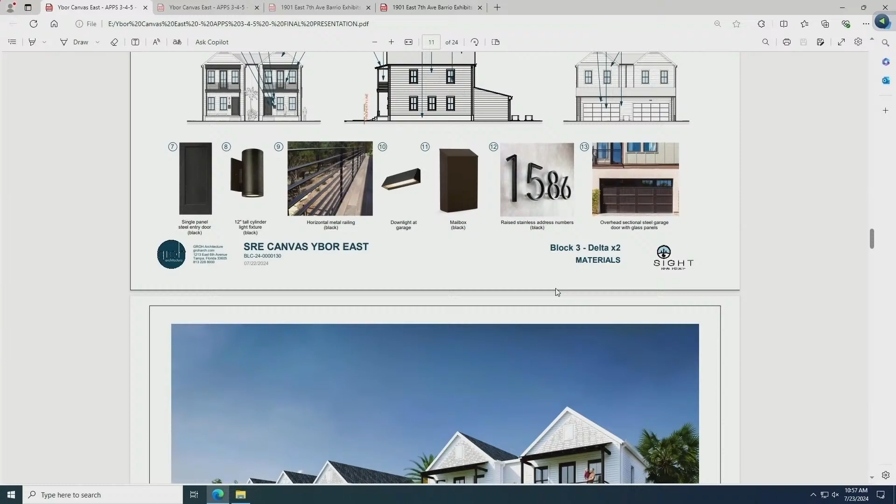If you can just scroll down to see that full page above the rendering. Yeah, I want to see the full page. There you go. At the garage, the roofing will continue to be the shingle roofing—is that correct? Yes, the garage shed.

Did you look at ways to break down the rear facade at the garage level so that the shed isn't so massive when you look at it? So if you look at your rear elevation—sorry, that's right, the small version is here.

When you reviewed the layout, I understand what you're doing internally—there's a stair to get you up to the main level. Did you look at ways to minimize that facade, because it is a longer elevation? You've got these really nice diminutive shapes at the front, but then they fail at the rear. If the alley becomes more of a pedestrian pathway, as we've seen in other neighborhoods brought back to a more historic context, it really is a big facade at the pedestrian scale. Did you look at ways to minimize that, maybe creating more of an inset between the two garage doors?

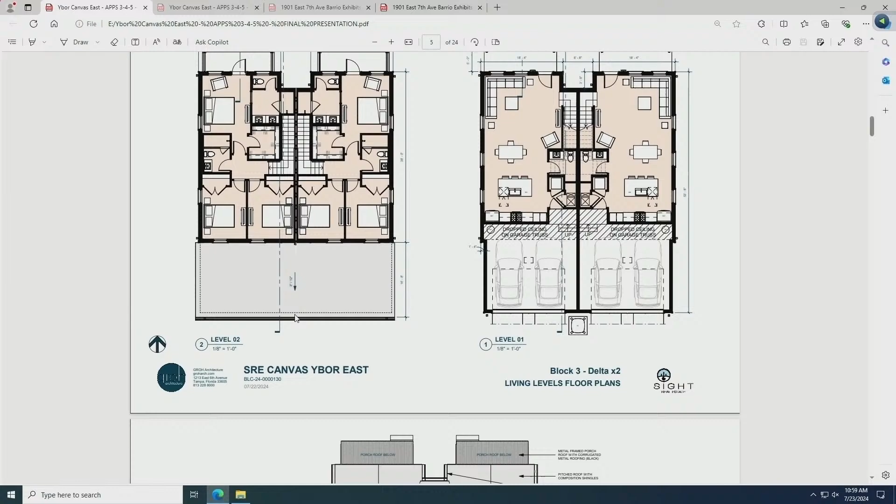We did. It's just that these sites are so tight because of that reduced depth—to get in the 3 bedrooms, we couldn't put an indention in these bedrooms. It would be nice if we could offset the garages, but we're right up against all the limits and restrictions. We're within the setback for the rear, but we wouldn't have the clearance for backup if we had an offset.

On the pedestrian experience walking around, we do plan to use a lot of landscaping to shield the HVAC units, the condensers.

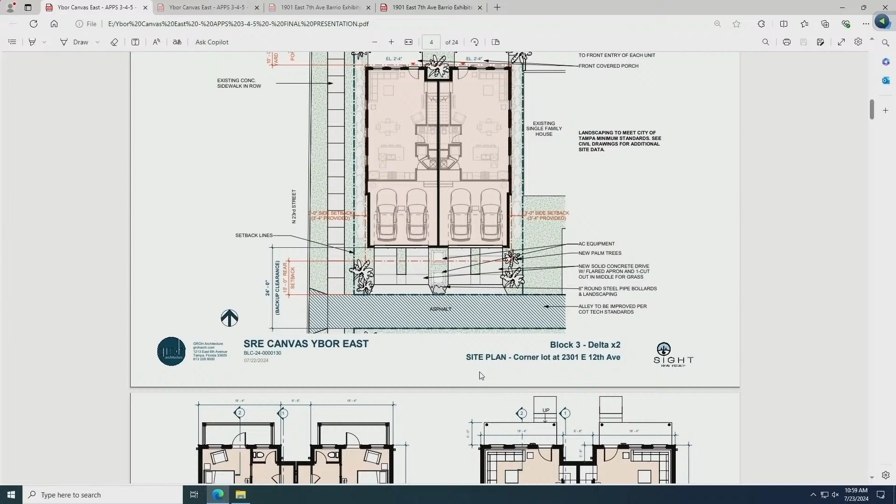So I think as you're walking, you'll hopefully see a big bushy type of landscaping, or even a palm tree there, something in between might help. We have limited space, but we'll really try to use landscaping to break it up.

Can we look at the west facade? Do you have that, the 23rd Street side elevation? Yes. I think we looked at that, and I understand this is typical for all of them, but we're speaking specifically to 130. Actually, this goes to all of them, but you talked a little bit about, and I think one of my fellow commissioners talked about how the siding's going to end at the grade for the garage.

What is your plan there? Because Hardie board does fail when it has too much water contact over time. So what is an idea that you have to resolve that issue? Do you have one? I'm totally okay with continuing the stucco banding. I agree, I'm always looking at quality and longevity, for continued reputation, so I'd be totally fine continuing the stucco banding as long as staff and the commission would.

I would caution you about completely taking it across. Maybe look at your precedents, look at your surrounding precedents. They're gonna give you an answer, and I know you know that, Stephanie. Just remember, it's a garage, so there is a support structure, even though it's attached. There are plenty of precedents around this property that will give you hints as to where you should go. But definitely think about how that siding comes to grade.

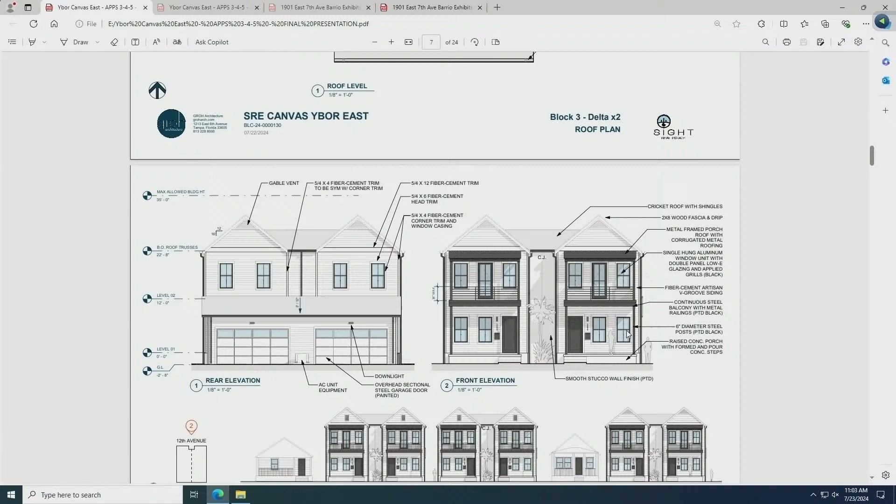We're gonna go, actually you have a few minutes if you want to summarize any comments of our discussions, of any proposed changes or about anything, and then we're gonna close the public hearing. I think we're fine. Okay, great, we're gonna go ahead and close the public hearing, and then we can have discussion on the case amongst ourselves.

I think they can work out, as the previous applicant, any final details with staff. I think the project overall looks good. Just to comment on the base with the foundation with the stucco and stuff, as mentioned, they probably need about at least 4 to 6 inches of clearance from the ground with the siding. So they're gonna keep that and just look at some precedents on how to keep that up, whether it's just a smaller stucco band around the garage or something like that, which I assume was likely gonna be the case.

But then you just have to work on that transition with staff to kind of input that into the project.

The second story of the rear elevation seems a little flat and has no relief. Actually, right here, I don't really understand what's going on right there.

Well, public hearing is closed, so we're having a discussion. I think it might be the rendering, because really that's going to be the shingle roof, so that'll be darker when it goes back. But I think our fellow commissioner expressed some concern about that long expanse of a rear facade with shingles right along the pedestrian experience. I think if that's darker, it breaks it up a little bit more.

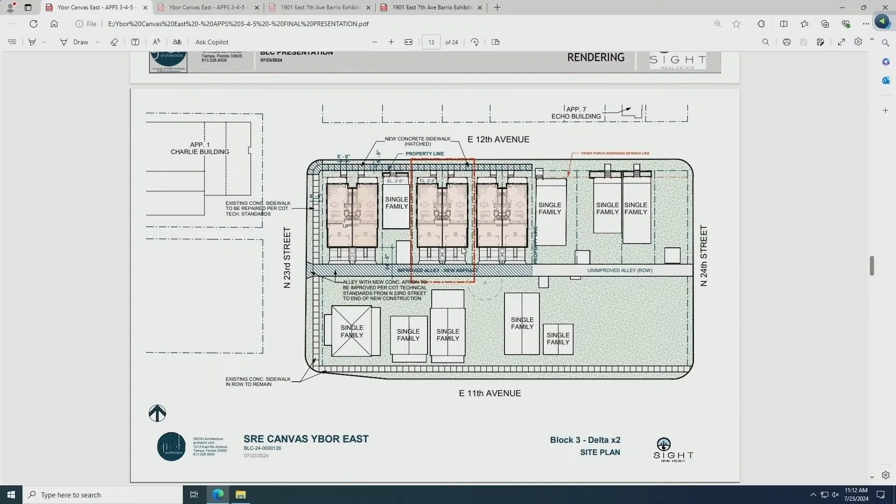So we're now on 126, which happens to be, on the site plan, the center of the duplexes. So that's just keying in on that building, and we've discussed the improvements, the site improvements that we'll be making consistently. This is an enlarged site plan, and again, the same rules apply: 5-foot porches, 5 feet as front setback averaging was used. The 3-foot minimum setback we've increased to 3'4", not just at this garage, it's pointing to this. We actually have an 8-inch additional offset on the garages, but at minimum it's a 3'4" setback. In the rear, we are well within the setback, but again have that 24-foot backup space.

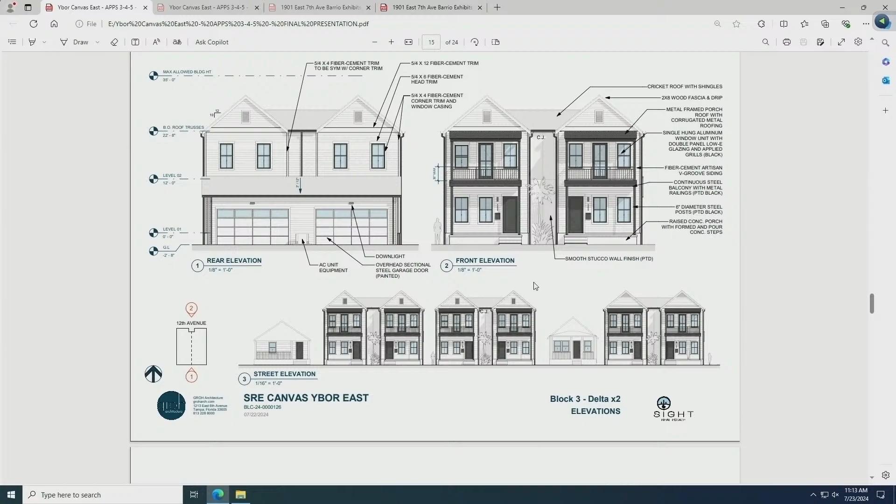And again, the only differences are all that we're showing you right now, and that is what we just discussed with the front elevations being, having a more traditional rectangular louvered vent and more traditional picket metal rail. It's all metal again, and everything else is the same. The side elevation shows that same detailing. The only difference here is the detail of the picket rail, the section showing that picket rail. Materials are the same except for those two items, the vent and the railing.

Now I'm ready for the next one. That completes my presentation, I'm going to take that all the way through. So staff comments are the same as prior. Anyone here from the public wishing to comment? Seeing none. Do the commissioners have any questions of the applicant? I have none.

Good, do you just kind of summarize? That summarizes our presentation. We're going to close the public hearing. Any discussion on the case amongst the commissioners?

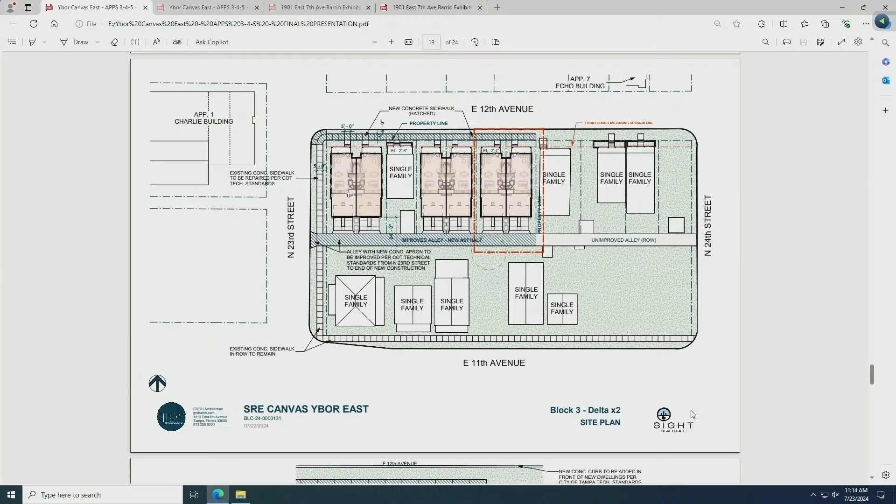They were the same conditions, right? Obviously, I think so, yeah. I agree. All right, so then we can move to grant certificate of appropriateness, final approval with conditions.

So move to grant certificate of appropriateness for the drawings and documents presented at this public hearing in BLC 24-0000126 for the property located at 2307 through 2309 East 12th Avenue, with the following conditions: that the applicant work with staff to finalize the front entry door, the garage door on the alley, and then to work on the stucco foundation and the transition around the garage.

Because based upon the finding of fact, the proposed project is consistent with the Ybor City Design Guidelines for the City of Tampa for the following reasons: it meets the design criteria for new construction based on height and width, facade width, setback, spacing, alignment, similarity of details and forms, and building materials.

Second the motion. There've been a number of conditions placed on this application. Can the applicant acknowledge these conditions were set? Acknowledge and fully agree. All in favor of said motion, say aye. Aye. Opposed? Motion carries.

Move on to 131. Good morning, Commissioners, Ron Vila. Just so we're reviewing the same project, we're going to go to the last case this morning, which is BLC-24-0000-131. This is for the address of 2309 through 2311 East 12th Avenue. The certificate of appropriateness is for new construction for a duplex with site improvements.

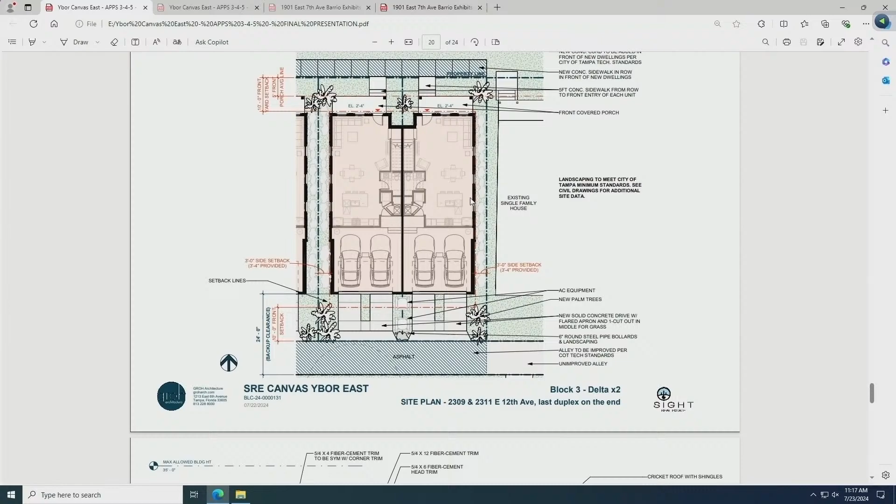Stephanie Gaines again. So this is the last of the three buildings today, the farthest duplex to the east on the block. Again, the same site conditions exist: we've got a 5-foot front setback, a 10-foot rear setback, and the 3 feet that we've increased to 3'4" on the sides so that we can have windows.

And this elevation is identical to 126 that we just reviewed. That's how we're presenting it today, with these same details with the railing and the vents at the gable end. That completes my presentation. Good morning, Commissioners, Ron Vila, staff with Historic Preservation. The same comments on the staff report are present.

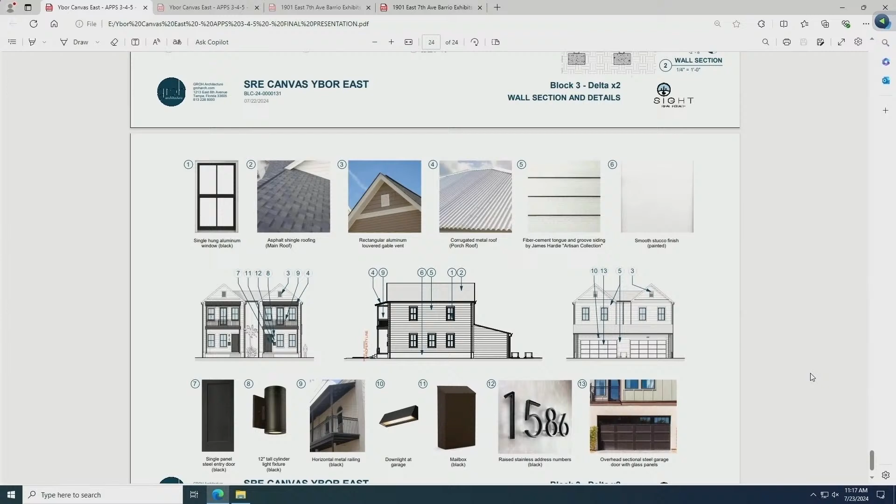Great, anyone here from the public wishing to comment? Seeing none. Any questions of the applicant? I have none. All right, and a few minutes if you want to rebut, summarize. Thank you for your time, and appreciate you all being here. Thank you, Stephanie. We're going to go ahead and close the public hearing.

Any discussion on the case, or are we ready for a motion? All right, motion. So move to grant a certificate of appropriateness for the drawings and documents presented at this public hearing in BLC 24-0000-131 for the property located at 2309 through 2311 East 12th Avenue, with the following conditions: that the applicant work with staff to finalize the front door, the garage door on the alley, and then finalize with staff the stucco banding at the foundation and how it wraps around the garage as well.

Because based upon the finding of fact, the proposed project is consistent with the Ybor City Design Guidelines of the City of Tampa for the following reasons: that it meets the design criteria for new construction based on height and width, facade width, setback, spacing, alignment, similarity of details and forms, and building materials.

I second the motion. There's been a few conditions placed on this application. Could the applicant acknowledge these conditions? Yes, we acknowledge and agree. All in favor of said motion, say aye. Aye. Opposed? Motion carries, thank you so much.